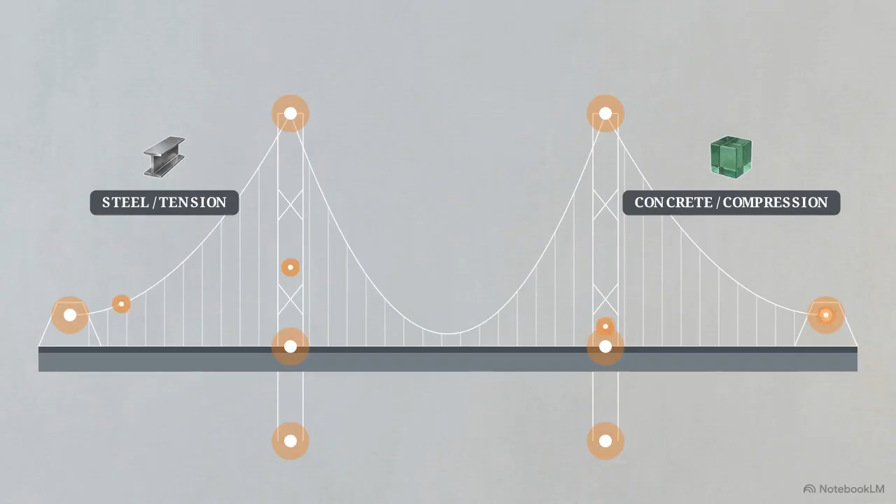Think about the sheer mass of modern civil infrastructure. We are talking about millions of tons of steel, concrete, and glass, all locked together in a highly stressed, interconnected matrix. To keep these massive structures standing and prevent catastrophic failure, every single beam and panel has to perform exactly as expected. Historically, the only way to guarantee that performance was to rely on rigid, time-tested recipes.

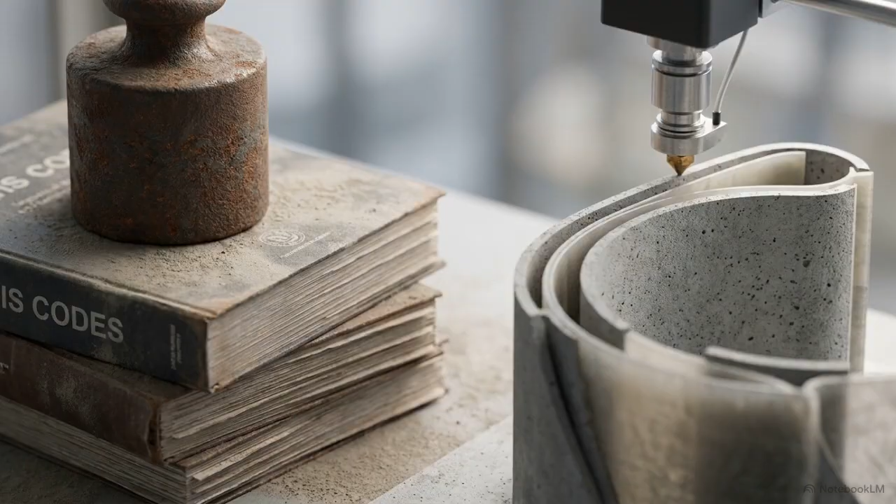Engineers depended entirely on the published Indian Standard, or IS codes, which dictated the exact chemical and physical makeup of every accepted building material. But the modern construction industry is evolving faster than those lists can be updated. Laboratories are constantly developing sustainable alternatives, recycled composites, and advanced synthetics. This creates a critical bottleneck.

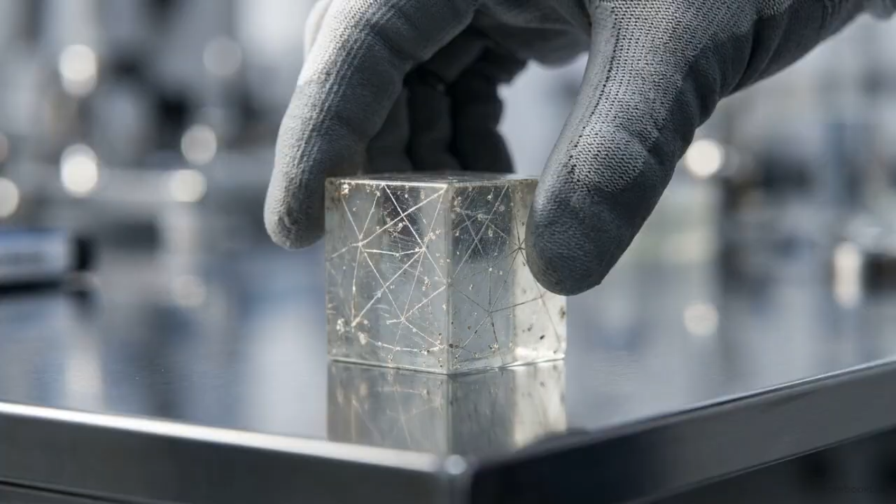You have a highly effective new material, but you cannot legally build with it because it doesn't have an IS code yet. Drafting, testing, and publishing a formal national standard for a single novel material can take years. That chronological gap between laboratory development and formal standardization actively blocks builders from using better, cheaper, and greener methods in the field. A modern building code cannot survive purely on historical lists. It requires a dynamic mechanism to safely absorb and verify unknown technologies.

That mechanism is built directly into the National Building Code of India 2016, specifically Part 5. This specific volume governs the quality and deployment of all building materials across the country. It is the definitive legal rulebook for what can and cannot be used in Indian construction. The foreword reveals a critical shift in logic, a preference for a performance-oriented approach rather than prescriptive approach.

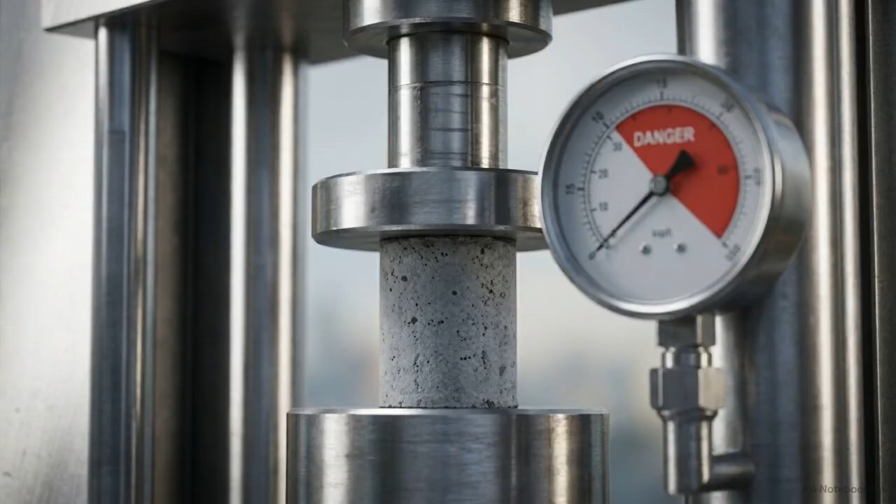The older approach dictated exact material compositions, prescribing the exact ratio of clay and sand in a brick, a fixed recipe. A performance-oriented approach flips that logic. It evaluates the measurable output of a material. It asks how much weight the brick can hold, how it reacts to fire, and how much it insulates, regardless of what it is actually made of. Part 5 operates as a legally binding, algorithmic pathway for evaluating and deploying the technologies of the future.

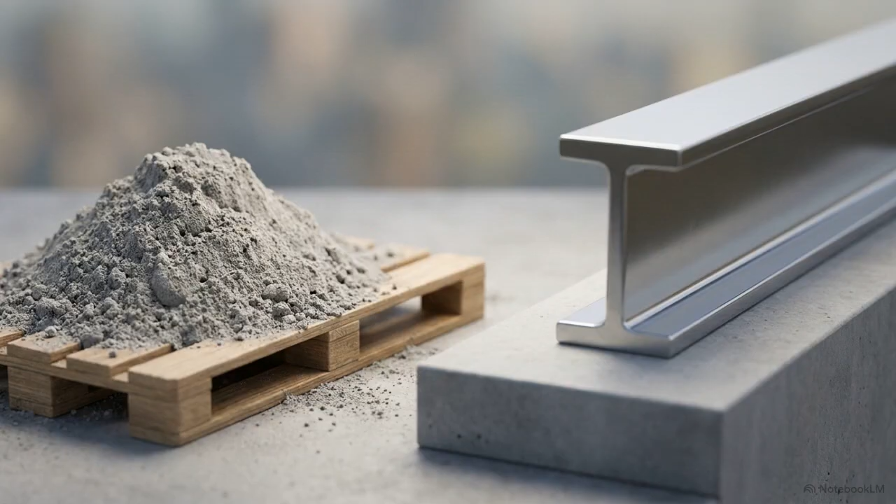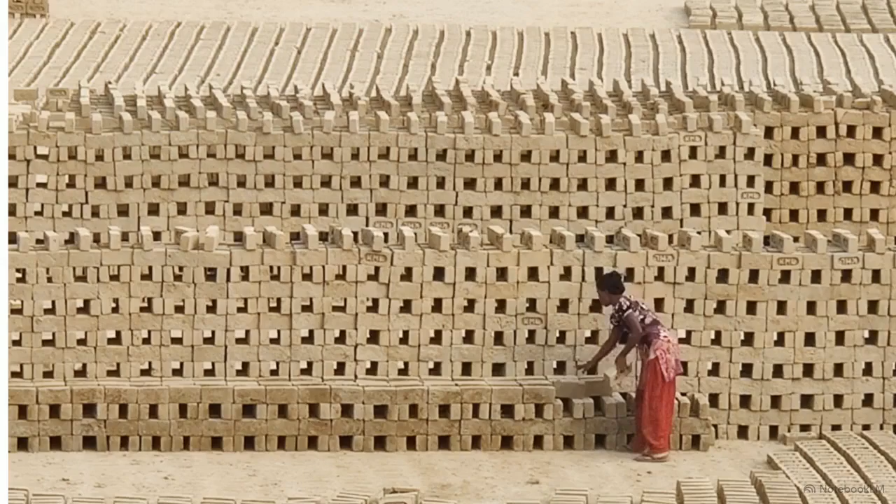For conventional components like cement and structural steel, the baseline prescriptive method still applies. The code maintains a traditional categorization framework, organizing familiar materials into 26 primary principal categories, with strict adherence to existing IS numbers. This makes sense for materials that have required massive manual production and traditional standardization for decades, like basic clay masonry.

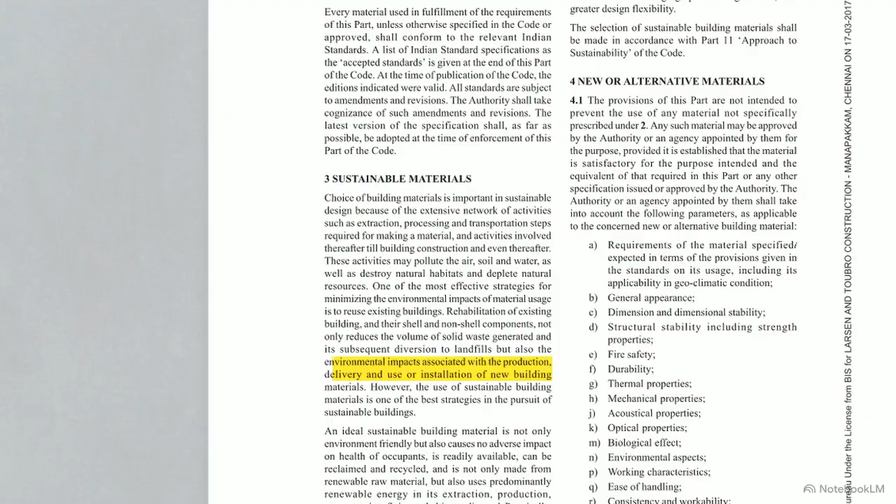However, the code immediately introduces a modern disruption in Clause 3, outlining a clear mandate for sustainable materials. This clause directs builders to utilize materials that reduce solid waste generated and lower the environmental impacts associated with production and delivery. It pushes the industry to prioritize options that use renewable energy in their extraction and minimize the depletion of natural resources. The conflict: highly sustainable, novel materials inherently lack decades of traditional IS standardization. To use them, engineers need a completely different legal pathway.

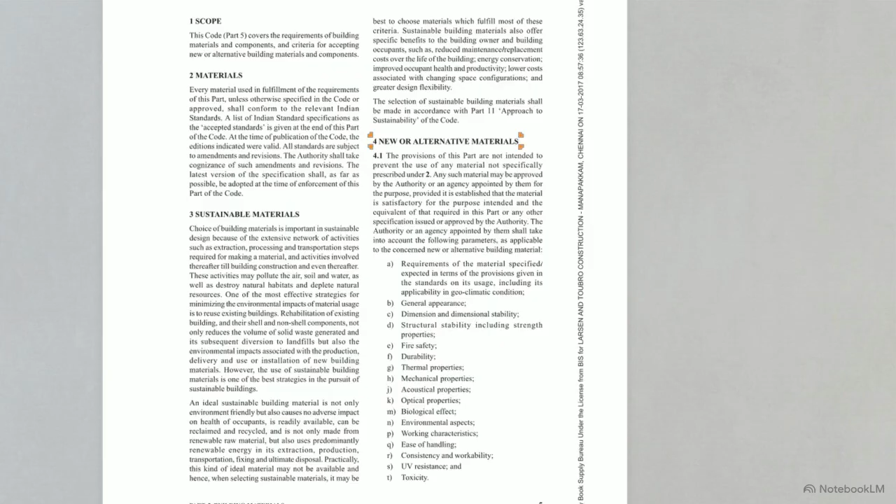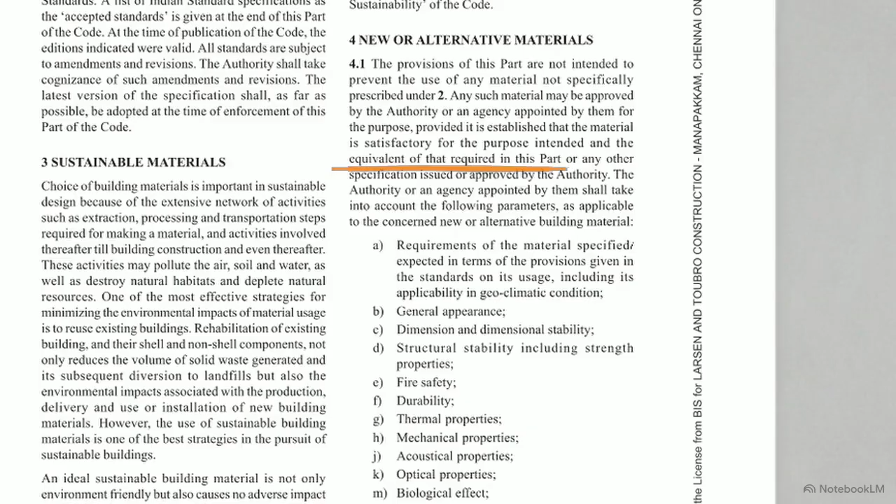That pathway is Clause 4, new or alternative materials. This is the operational filter bridging experimental research and legal field implementation. The core operating rule here is vital. Just because a material does not have an existing IS standard does not mean it is banned from use. Unstandardized materials can be approved by demonstrating performance equivalent to what the code requires. To prove this, the code deploys a rigorous 17-point testing matrix. Every proposed new material is measured against parameters A through T.

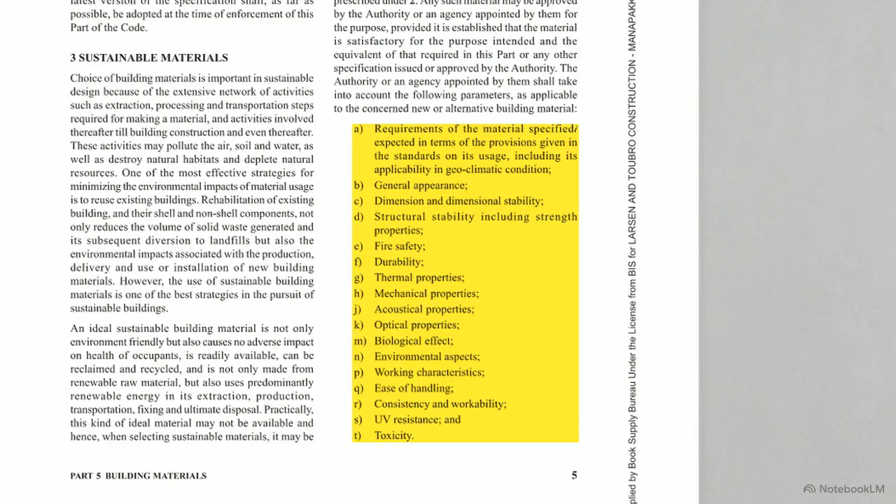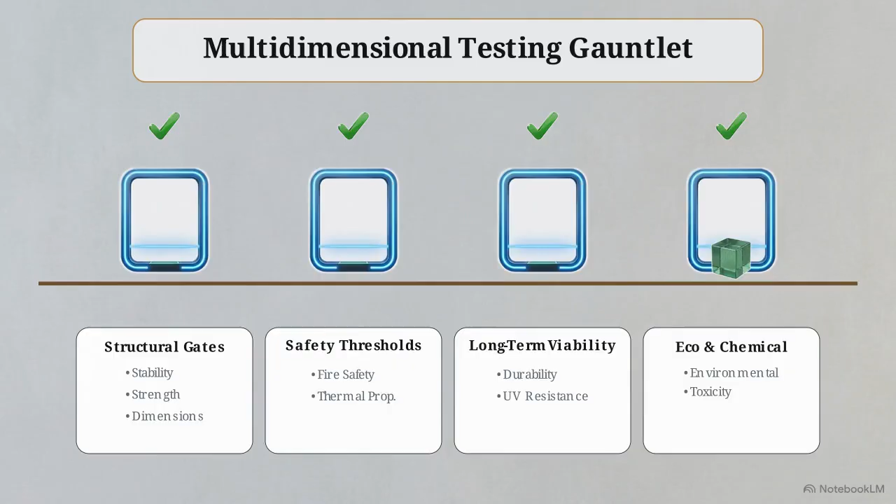Finally, it faces the ecological and chemical gates, passing strict reviews for overall environmental aspects and proving absolute non-harm regarding toxicity. Clause 4 replaces subjective historical judgment with an objective, data-driven system evaluation. But who is actually responsible for executing this 17-point evaluation? The legal burden of proof falls entirely on the owner or the agent proposing the material. They assume all responsibility and all costs for proving its viability to the authority.

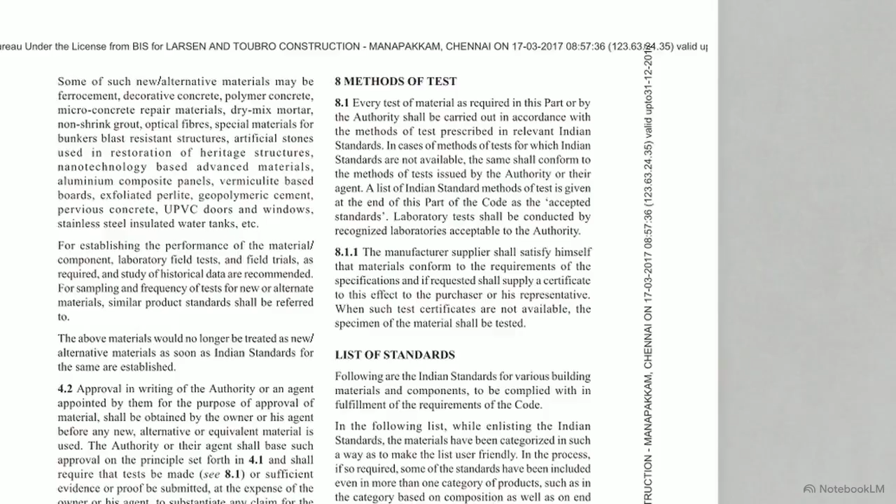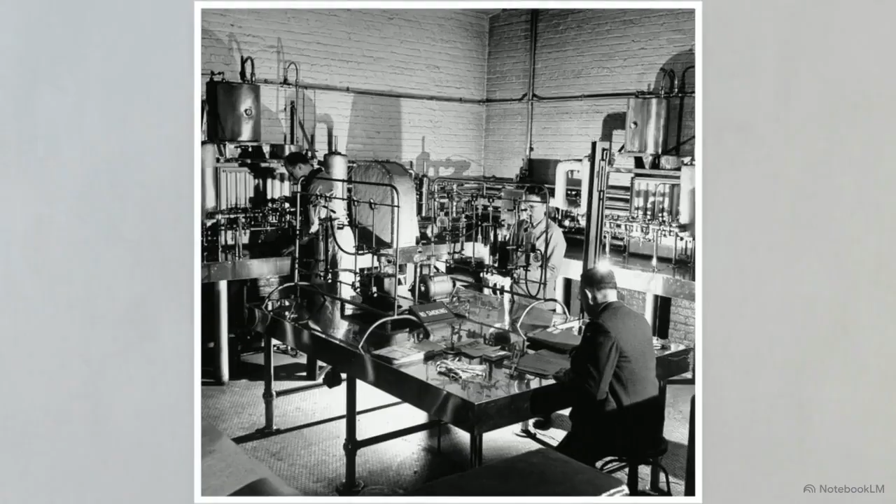Clause 8, Methods of Tests, dictates exactly how this proof is gathered. It strictly requires authentic laboratory test data, documented field trials, and detailed historical study data to substantiate any performance claim. The industry is far past the days of intuition-based compliance or relying solely on older historical checks. The modern code demands verifiable, rigorous laboratory execution.

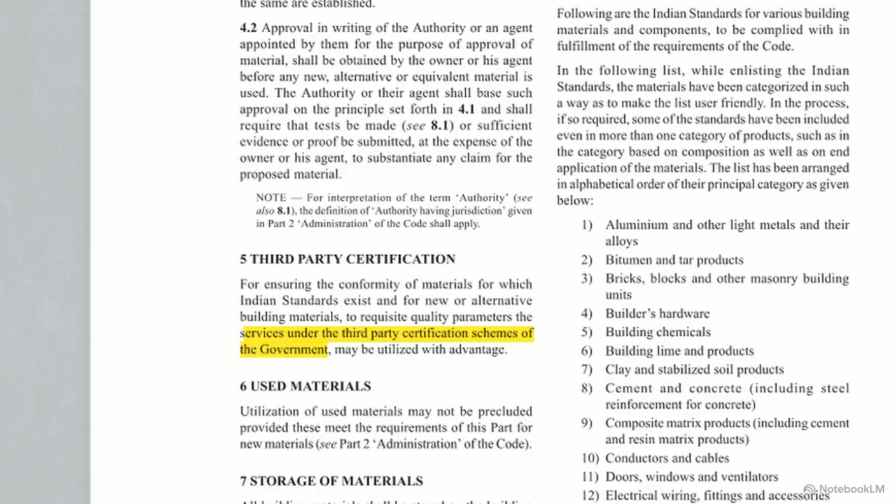Clause 5, third-party certification, serves as the critical buffer against biased manufacturer data. The authority utilizes these independent, government-recognized third-party certification schemes to guarantee that the requisite quality parameters are actually met off-site during mass production. For an innovation to survive, it must complete the full compliance loop: private research and development data, verified by independent laboratory testing, leading to final authority evaluation and legal deployment.

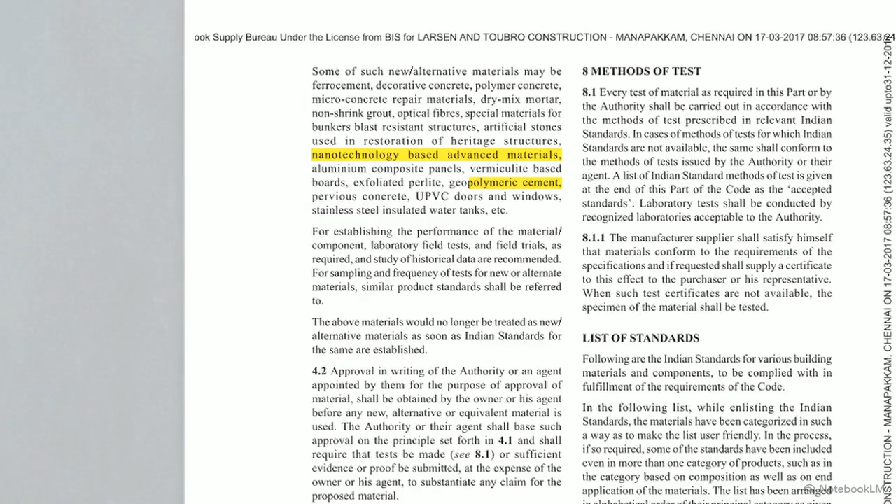This performance-oriented process actively shapes modern infrastructure. Because of this pathway, the code already explicitly recognizes a massive range of unconventional materials that have successfully navigated this performance filter. The list includes everything from decorative concrete and dry mix mortars to nanotechnology-based advanced materials and geopolymeric cement. This is how an entirely unconventional material safely transitions from an unknown laboratory variable to a fully integrated legal structural component. The mechanism in Clause 4 actively pulls the national construction industry forward, rather than anchoring it to the materials of the past.

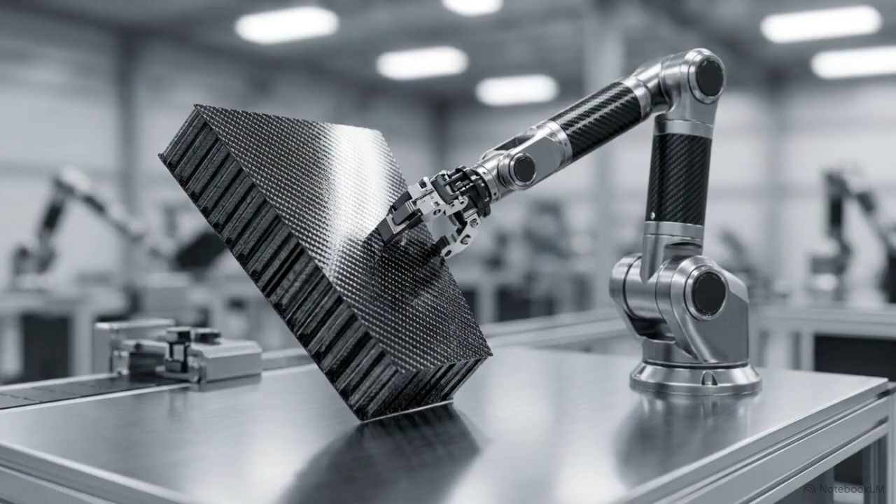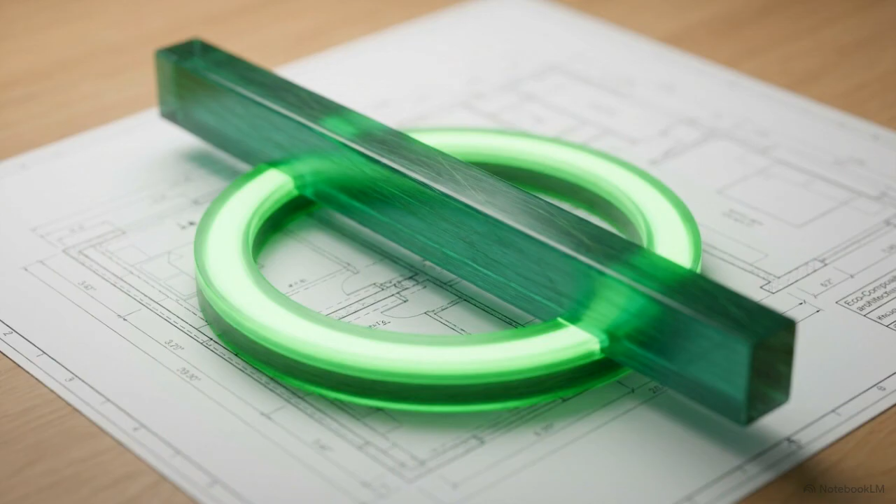NBC Part 5 represents an evolution in regulatory philosophy. It functions as a dynamic interface, a precise bridge connecting established infrastructural safety with future technology. It acts as an uncompromising filter, blocking dangerous, untested materials from entering the market, while simultaneously fast-tracking proven, sustainable innovations. For the modern architect or engineer, engineering compliance no longer relies on searching a 26-chapter index for a specific IS code to tick a box. True modern compliance is about proving a material's capability against a comprehensive, real-world matrix of physical, chemical, and environmental parameters.